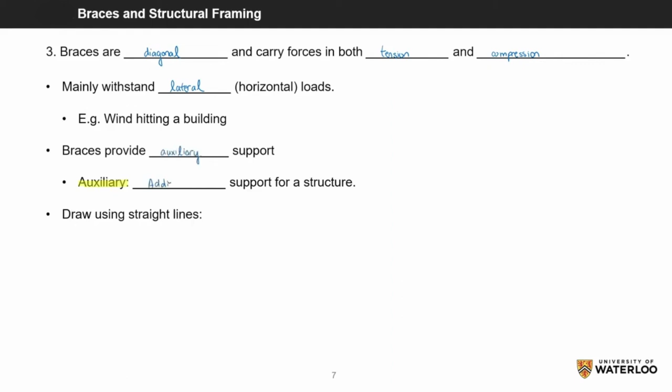Braces are usually diagonal members that can carry both tension and compression forces. Braces mainly withstand lateral, or in other words horizontal loads, such as wind hitting the wall of a building. Braces help to increase stability in a structure and serve as a secondary support, which is termed auxiliary support.

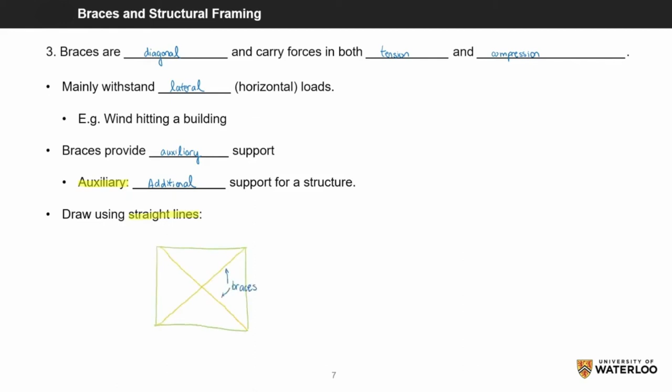Like beams and columns, we draw braces using straight lines. The lines in yellow are the braces. We will now examine how braces resist forces. If there is a force applied from the top left, the brace highlighted in purple will be compressed, and the other brace highlighted in blue will be in tension.

If a force was applied from the top right, then the brace highlighted in blue will be in compression, and the brace highlighted in purple will be in tension correspondingly. When braces are carrying a force, one brace will be in compression while the other will be in tension.

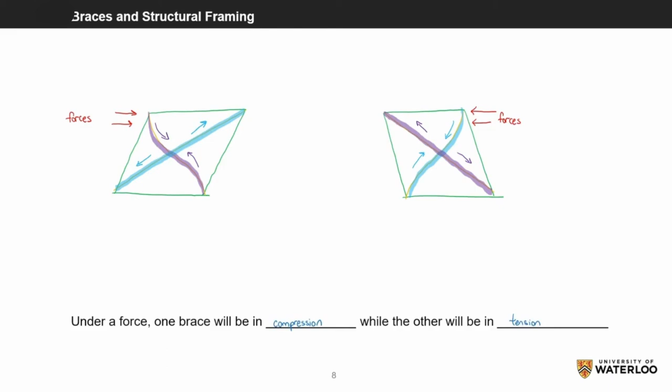Pause the video here and see if you can identify where the braces are in the structure. Here are the braces outlined in purple. Now, assume a wind force was hitting the building from the top left. If there were not any braces and the load was strong enough, the building will collapse to the right. Since there are braces, the brace colored in blue will be in compression, and the brace colored in green will be in tension to prevent the building from falling.

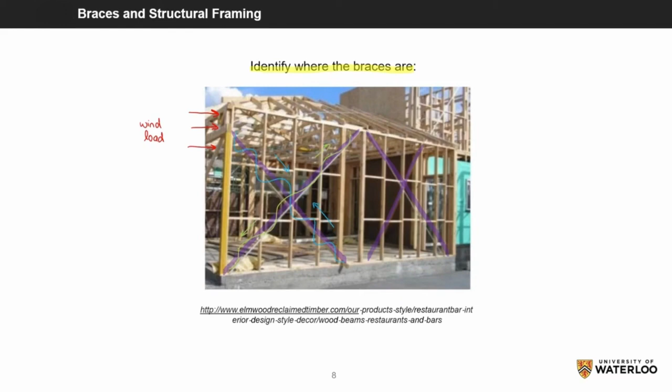There are different kinds of structural framing, and we will look at two types. Trusses carry forces in both tension and compression. They do not carry moments or allow bending to be transferred from member to member, since the connections are pin joints. Recall that pin joints carry movement in the X and Y direction but do not carry moments. It should also be noted that trusses are mostly made up of triangles.

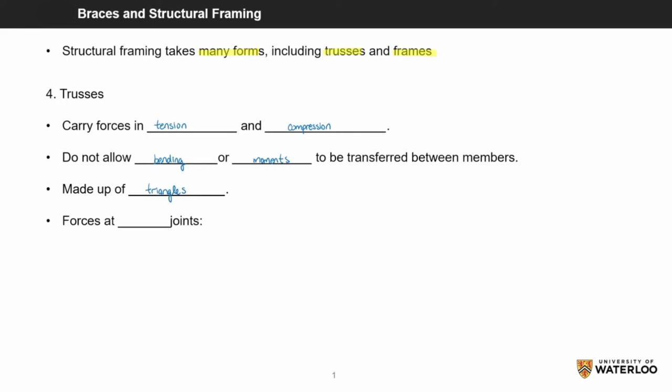When we show forces being applied to a truss, typically they are only applied at the joints. They are drawn with straight lines as the individual members and pin joints as circles for the connections. I have drawn an example here with yellow lines as the members and green circles as the pin joints. If we assume there are forces acting vertically downwards at the joints of a truss, the forces will be distributed downwards until they reach the bottom members, which then distribute the forces outwards. I have shown the direction of the forces with blue arrows here.

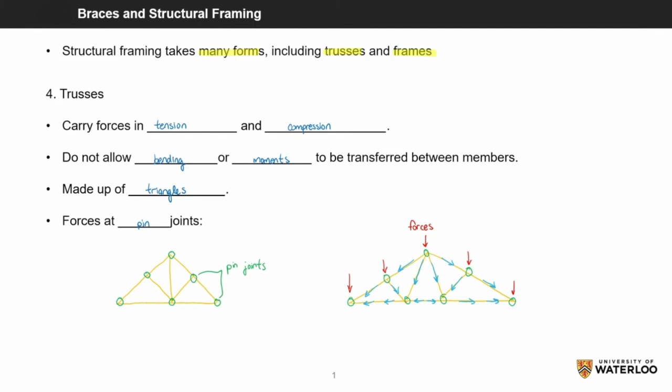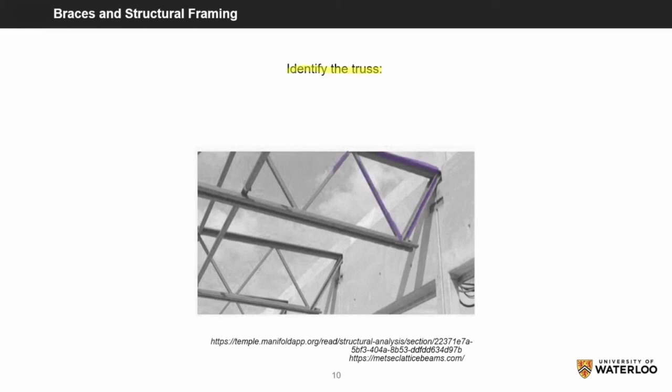This is an example of a truss in real life. See if you can determine which part is the truss. I have outlined the truss in purple. Assume there is a force acting perpendicular to the joints of the truss. See if you can draw in the force arrows. There are forces in both tension and compression here. The forces will be distributed in the direction of the green arrows I have drawn.

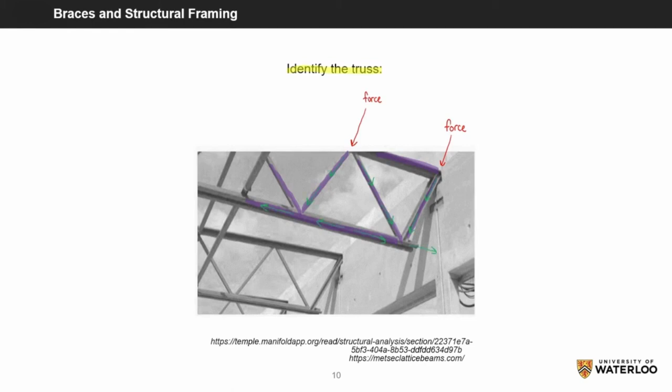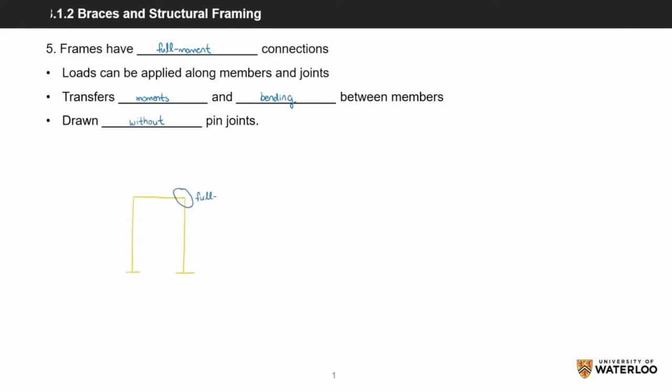Frames are different from trusses because they have full moment connections, which means that they do transfer bending and moments from member to member. Recall that a full moment connection is a stiff connection and does carry moment. Loads can be applied along the members and not only the joints, because the members can carry forces by bending as well. They are drawn with straight lines as the individual members, but without pin joints for the connections. I have drawn an example of a frame with straight members in yellow here.

We will now draw a frame and assume a force is applied vertically downwards at the top. The beam on the top is carrying the load by bending, which I have shown with green arrows. The beam then passes the force to the columns that carry the force through compression, which I have drawn in purple. This goes back to the beams and columns that we learned about earlier. To avoid confusion, the arrows I have drawn mostly represent how the load path is distributed, and do not represent how the forces are being carried by the members.

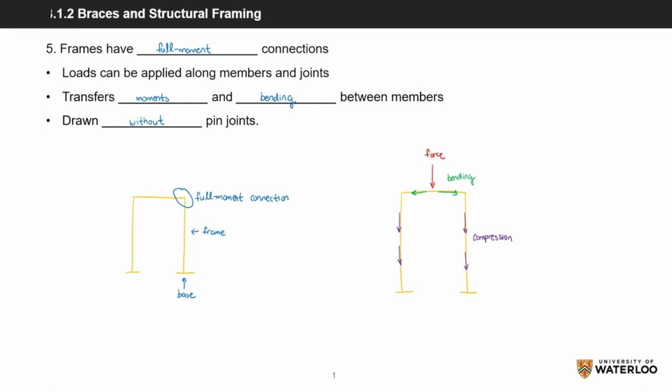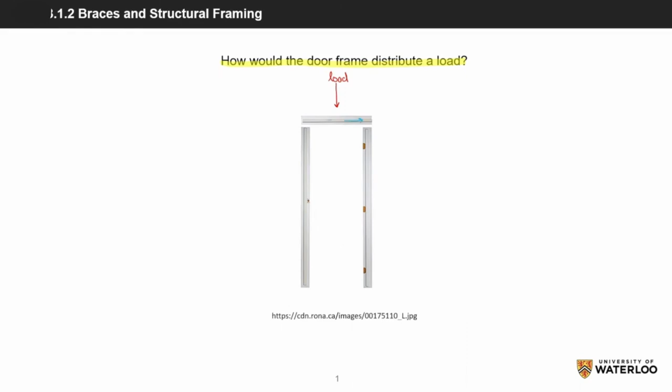Pause the video and see if you can determine how this door frame would distribute a load, using the information provided in the previous slide. We will assume there is a vertical downwards point force acting at the middle of the door frame. The beam along the top would distribute the force outwards by bending. It would then pass the force to the two columns on either side, which carry the load by compression, and distribute the force eventually into the ground. Follow the direction of the blue arrows I have drawn for a visual representation of the load path through the frame.